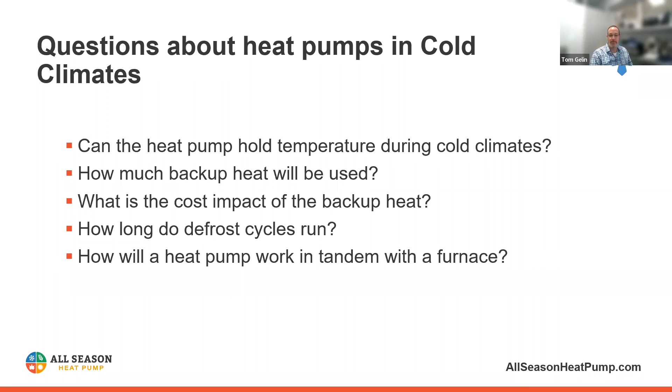So I imagine he was fairly conservative in his heat loss estimates. On the right side, the older home, that was heated by an oil furnace.

What we did was we pulled out the oil tank, we ripped out the furnace, and we have an all-electric solution on the green side, the west side. On the east side, because the load was more than the heat pump could handle, we decided to try out a dual fuel system on that side.

So when the heat pump can't supply the amount of heat required, the heat pump comes off and the furnace kicks on in heating mode. And in the cooling mode, it's of course all air conditioning. But we're just talking about heating today. That's where the bigger challenge is for cold climate heat pumps.

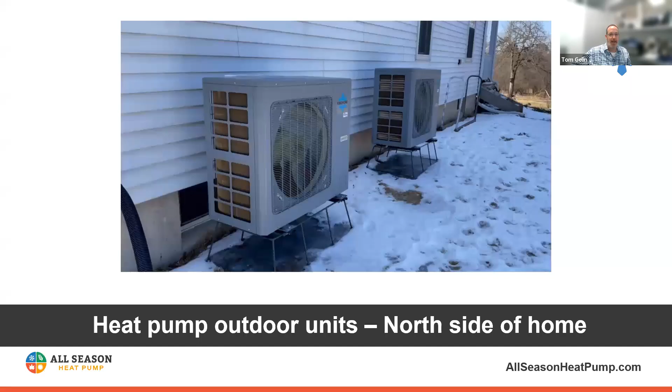Okay, so that's what we're looking at. Here's a picture of the installed heat pumps. This is obviously a beautiful winter kind of a day, but this is when the heat pumps are really going to be doing their work. So we got some pictures of that. They're mounted on the north side of the house.

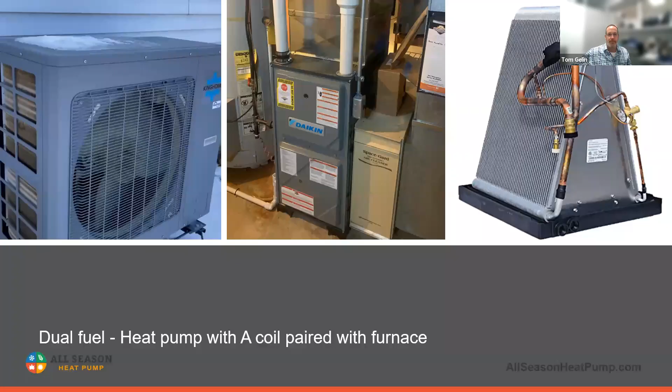Okay, so here's our east unit. So we've got our cold climate heat pump mounted outside. This is our dual fuel arrangement. So the owner bought a new Daikin furnace. And then above that is our heat pump coil.

I'm not sure. Can you see my mouse moving around? Eric? Yep, good. Okay. And then so yes.

Maybe not these dimensions, but the cold climate heat pump, or just basically the heat pump coil, is installed right above the furnace. And on the west side of the house, this is the smaller side, we have a vertical air handler. You can't see all of it, but at the discharge of the vertical air handler is our electric resistance element. This one's sized for 8 kW, so it's a fairly substantial electric heater, but keeping in mind that we don't anticipate it to run very often.

And so here's the guys from Professional Services today installing it. So that's what our setup is for our test.

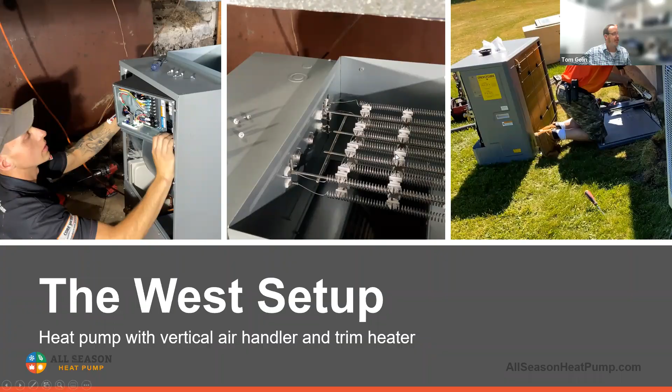Now, all we're using here is just a clip-on current transducer and then a data logger. So this is the power monitoring side of it. And for the temperature, we're going to monitor the inside temperature and the outside temperature and relative humidity. It would have been nice to have two of these. We just have one but there were two systems, so we kind of have an average temperature of what's going on in the house.

Okay, so here's our service tech, Zach, clipping on. You can see this, if you go down into this basement, it's something else down there. It's something out of Silence of the Lambs for those of you who are old enough to have seen that movie. Anyway, he's just clipping over the lines, and we're going to meter.

Now here's what we're metering. We're metering the east heat pump in totality, so not the individual fan or the compressor. It's the whole heat pump outdoor unit.

We're also monitoring the west indoor air handler. So the air handler is basically the fan that pushes the air through the system, and then the electric resistance element going on at the same time. And then the west heat pump. What we are not monitoring is the furnace. We didn't feel like it was necessary. And then also we're monitoring the outside and inside air temperature and the outside air humidity.

Okay, so why do we pick this particular week? Hopefully you all can see this. It's a little hard, going back and getting historical temperature information for the city of Saukville is not easy to find, but I did find it. So if we can just follow along why we picked this week, we started monitoring on Friday the 11th.

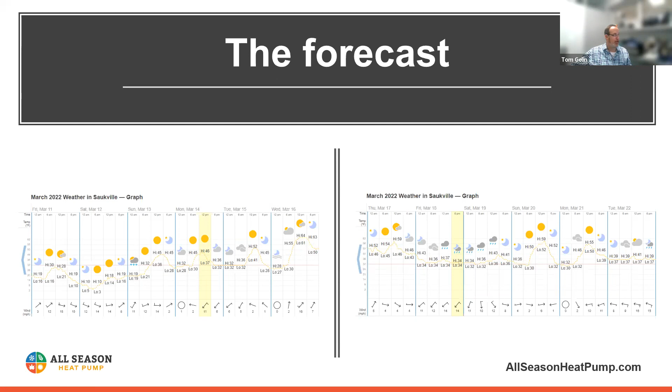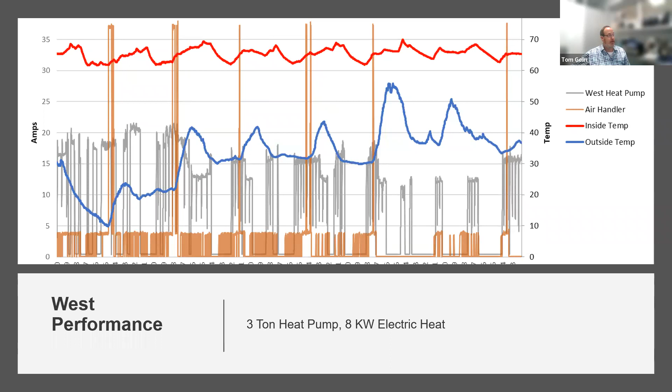So let's take a look a little bit. The first question we're asking ourselves is, how much is the electric heater on, and when is it on? Right out of the gate, when it got down to 3 degrees, the electric heater did engage for 74 minutes. And then over the course of the week, it engaged for another 20 minutes, 2 minutes.

And we can tell because the fan itself, when it's on, only requires 4 amps to run, and you can pull this off this middle data. When the heater is on at 8 kW, and you do a little bit of math at 240 volt single phase, the heater will max out at 37 amps. And then the heat pump runs at 18 amps. Okay, so we'll take a look at this in just a little bit more depth on what it means.

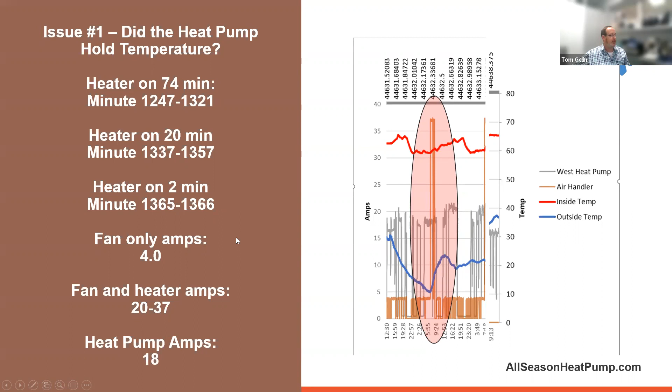Now, at the same time, that trim heater comes on, it produces 27,000 BTUs with double the amperage. So this is part of the reason why we want to make sure our cold climate heat pump is working through as much of the winter as we can, because we have to double our power.

Now, if you can imagine, if you had a heat pump that shuts off at 5 degrees or 0 degrees or whatever, then instead of running 18 amps throughout a lot of the winter, you're going to be running full load, which is going to double your electric consumption, while at the same time also running the heat pump simultaneously. So that's not good. We want to really minimize that electric heat backup.

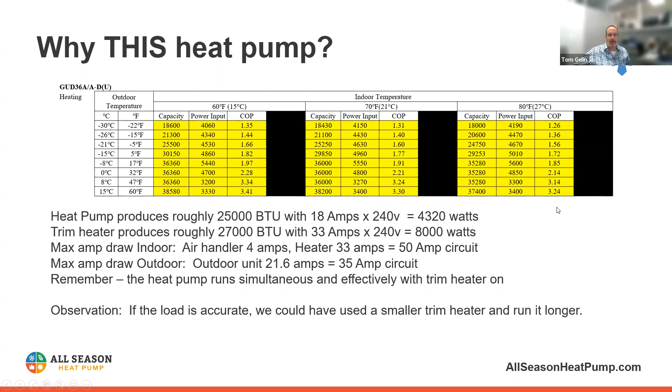All right, so that was fast and furious. Let's keep looking. Now, over the course of the week, it is my guess that this was on because of our cold climate situation. But with the temperatures here, it seems like this would have been a time that defrost cycles ran because we weren't under the capacity of the unit.

So it looks to me like our electric heater is kicking on in place as the unit's cycling through its defrost. That's the assumption that I made. And here's how long these alleged defrost cycles were running - 17 minutes, which is kind of like what you see online with how long a defrost cycle runs. And in a defrost cycle, what are we doing? We're running the heat pump backwards to push the heat out to melt the ice off the outdoor unit.

We'll probably have another webinar on that topic in its entirety. Okay, so these are the assumptions that we made.

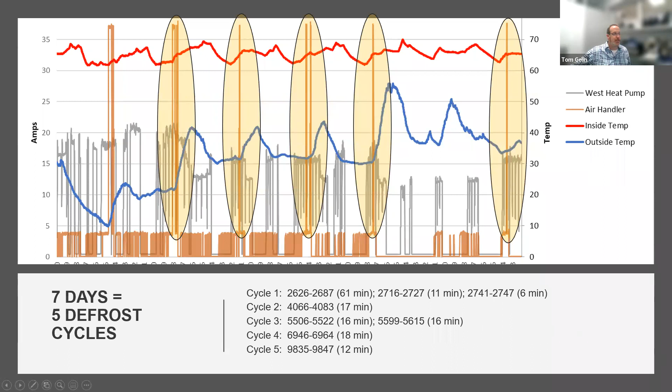This is what a heat pump looks like when it's in partial defrost. Usually in a full defrost, this thing would be completely iced over, but we can see that it starts at the top of the coil and works its way down. Because when the refrigerant is boiling inside and comes back as a liquid, that's where it'll see frost and then work its way down the coil.

So again, this is what the indoor air handler looks like, its components, and this electric heater is sitting on the top. Defrost cycle comes in all sorts of conditions, but over the course of the winter, as the temperature drops, the relative humidity always seems to be fairly high. So we could be running defrost cycles down to 10 degrees all the way up to 40 degrees.

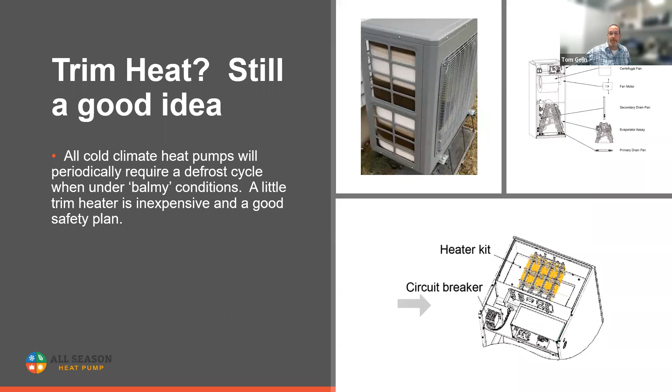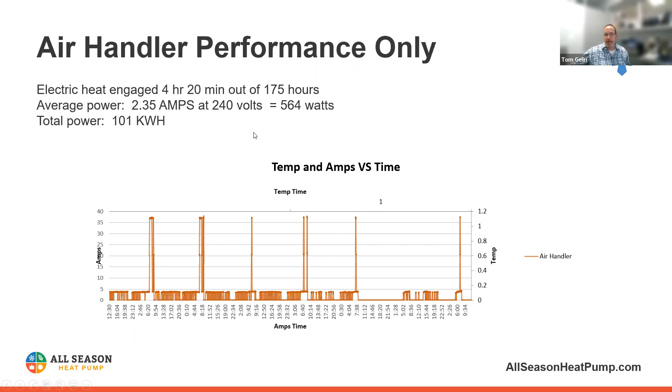If we sorted it, you can see that this electric heater really ran for just a very short period of time. We already had the totals, but just to put it in relative perspective. Then the fan was off for half the week, which would be typical for a Wisconsin winter over the season. Maybe not January, but over the whole season, we'd be cycling on and off, and we'd be on half the time.

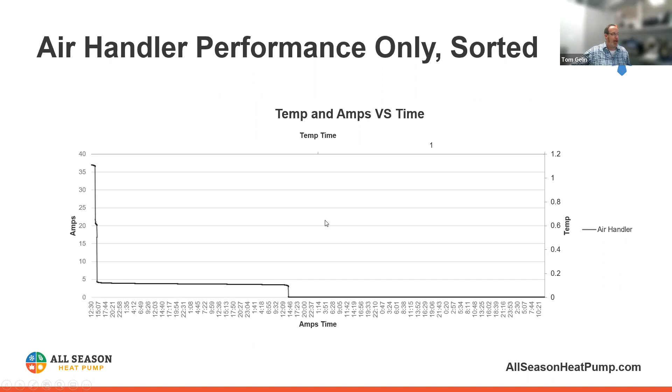As far as the West heat pump, this is again the all-electric heat pump. This is just the heat pump on and off and on and off. So yes, it is a variable speed heat pump, and we're getting different cycles, but a lot of the time when it's cold outside, it's either on or it's off.

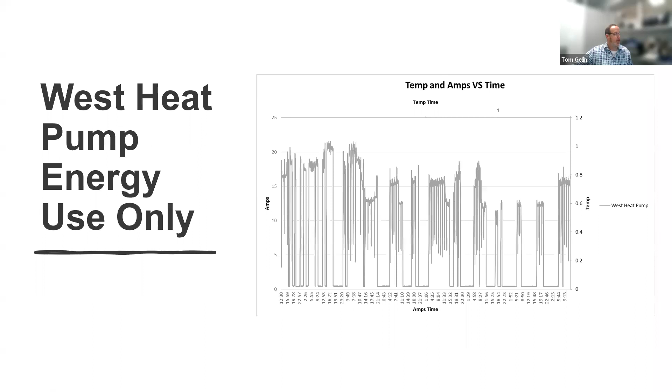If we sorted that over the course of the week, we can see that a lot of the time the heat pump's off, and some of the time it's in some partial load condition, and some of the time it's in basically full load.

Over the course of that week, what I did was take an average of all these data points, came up with an average of 8 amps times 240 volts, 1920 watts. Over the hours that it ran, it was 336 kilowatt hours for about a week. So end of the world for utility costs? Not really.

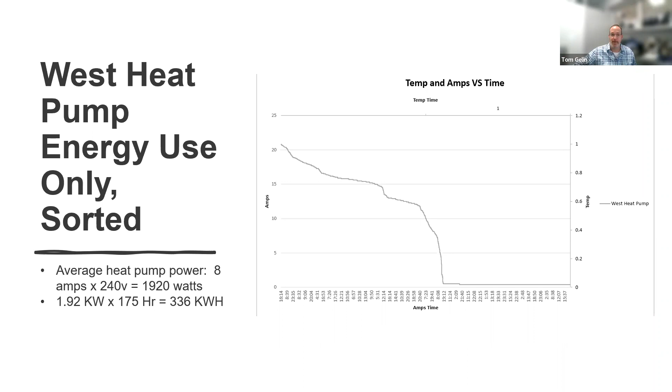This heat pump's been in operation - you saw some summer pictures - made it through its first winter. If I'm not mistaken, Saukville got all the way down to -12 for some time, so we did fine. I talked to the owner regularly, and they're very happy with the heat pumps they've got.

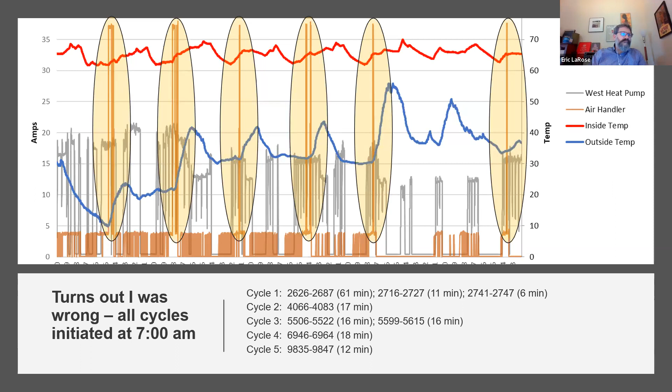Now this is the whole 'hey, let's not ship anything till it's perfect' situation. We started looking at the data, and it didn't make a ton of sense to any of us because we couldn't figure out why the defrost cycles seemed to have spacing that was almost equal. Turns out these aren't defrost cycles at all. Sorry to mislead you, but this is kind of how we came up with the information - we had it all figured out, and then we had to look back again.

What happened was the owners run night setback, which I don't know that we should have or shouldn't have told them, but they set their thermostats back to 60 some odd degrees. You can see on the temperature chart that it's dropping. Let's assume it's maybe 63 degrees, and then at 7 o'clock they turn the heat back up.

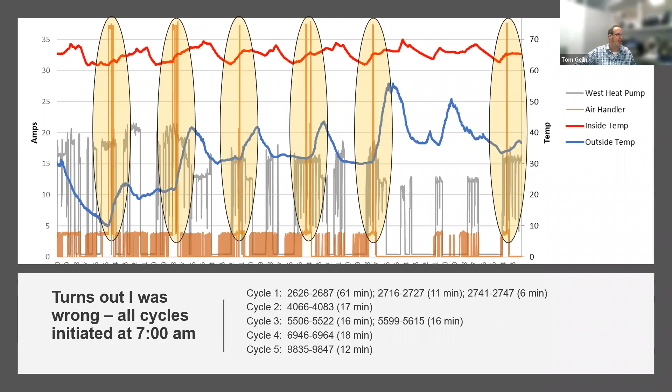So what happens is it's just a regular heat pump thermostat, not a Gree thermostat - it's a Honeywell heat pump thermostat, a really nice one. At any rate, the heat pump comes on, and it's not like a furnace where it's got all this extra capacity - it's got enough capacity to meet the load. After a couple of minutes, the thermostat says we're not meeting the space temperature, so we turn on the electric heat. What a shame. So here's when we go to the actual source data where we've got this all the time.

We've got the time, the power, and the outside temperature and all that. So at 7 o'clock every day, the thermostat says, let's run it back up to 70 degrees. After 1 or 2 minutes, the electric heat engages to keep us going. So no doubt that on Saturday it got down to 3 degrees in the morning, and it needed the electric heat to get to space temperature.

Had the heat pump been holding temperature, this 78 minutes would have been a lot shorter. On Sunday, it only took 17 minutes to bring the space back to temperature. Odds are that on Sunday and Monday, 16 minutes, maybe even Tuesday, and definitely Wednesday and Friday, we wouldn't have needed to run the electric heat at all.

I thought those were defrost cycles given the amount of time they were running, but turns out that was just the thermostat trying to keep up with the space. So boiling this down, we've got 78 and maybe 150, maybe 200 minutes. We probably could have gotten that down to maybe 20 minutes of electric heat use when it was down at 3 degrees. We'll have to do more experiments, but we wouldn't have known that had we not done the field test.

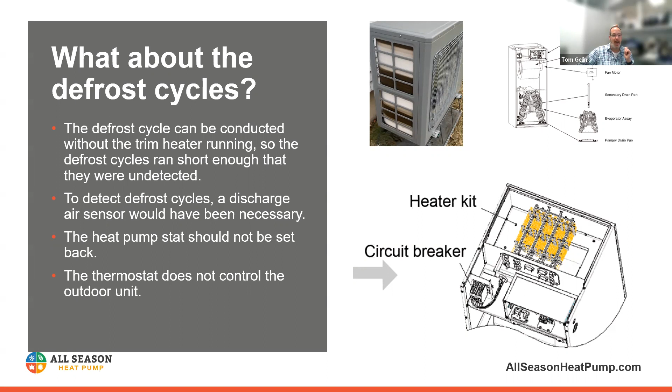So we think we have it, and I'm going to show you something next that makes me think we have it. I'll show you here—I'm going to share something else.

Let's see. Eric, are you seeing my spreadsheet or do I need to reshare? I do have to take it off of mute. I am seeing your spreadsheet.

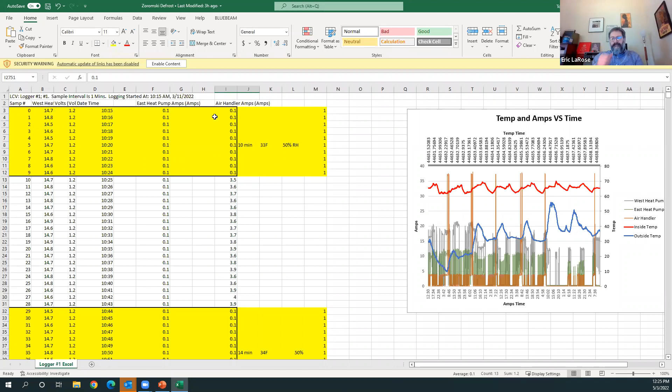Okay, great. So this is how the raw data came out. At 0 minutes, we're just hooking up our meters onto this equipment. Let's go a little bit slower. The west heat pump is the all-electric system. The east heat pump is the one that's tied to a furnace, and it looks like it's just off, or we haven't hooked it up yet.

So 0.1 amps tells us that the controls are running and that's it. On the air handler, same thing—the controls are running and that's it. We're going to be looking at column B and column I, and I've added this data. It was a little tricky because we set our temperature and humidity at 5-minute increments, and our power monitoring at one-minute increments, so I couldn't cut and paste—I had to do some handwork to get all this information in.

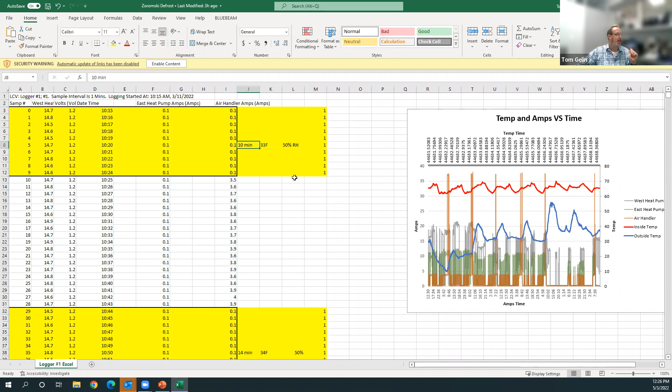So it would make sense that at 33 degrees and 50% relative humidity, we might be running a defrost cycle that ran for 10 minutes. Now at minute 10, which is 10:25 in the morning, our fan is running and our heat pump is running, and we're somewhere in this area on the time grid.

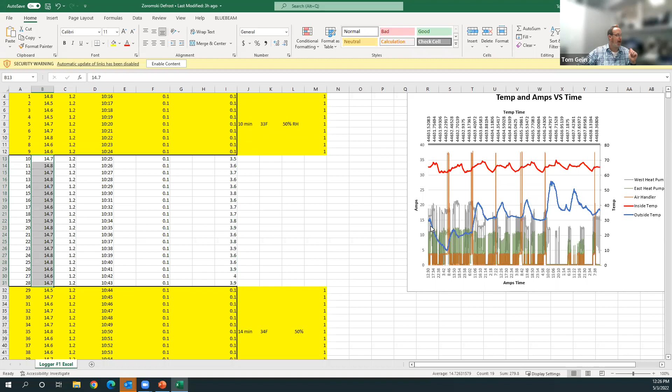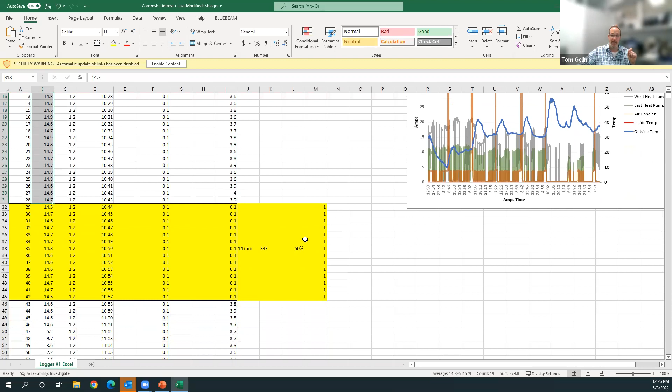So we're at a cooler temperature, so it makes sense to heat. And then we run another defrost cycle for 14 minutes. Now, we're going to revisit this data at a future webinar. This is just our best guess.

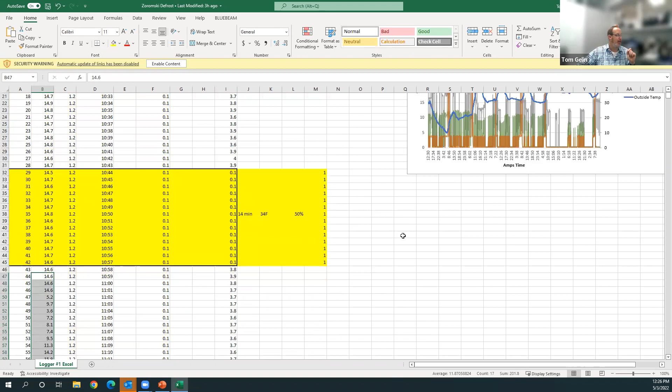And then it's off, the defrost cycle is off. We're back to running our fan, back to running our heat pump. Remember, it's getting colder outside. So we're cycling: defrost, heating, defrost, heating, defrost, heating, over and over.

And then we get to a point where we're just running continuously, because it's colder outside. I didn't plot all the temperatures here, but we know from our original grid it was getting colder and colder. That makes sense, because as it gets colder, the relative humidity outside drops, so there's less moisture to freeze on the coils. That's why we're running for a long time in heating mode.

Notice our heat pump's capacity changing. Sometimes it's nearly full at 18, sometimes it's down at 8. We're just matching our load.

Oh, a little defrost cycle—what time is this? This is at 4 in the afternoon. Again, a long period of time that the heat pump's running. At one point it turned off over here.

And then some more defrost cycles. Now we got some data later in this spreadsheet showing the heat pump's defrost cycles running a bit longer than I would have anticipated, so we want to play that out. But it seems like typically the defrost cycles are 5 to 15 minutes, which matches what you'd find just doing a defrost cycle search on the internet.

The mechanics of all of it, regardless of the heat pump, are the same. You're trying to boil refrigerant in a cold climate, so you're going to freeze the moisture that's outside on the coil.

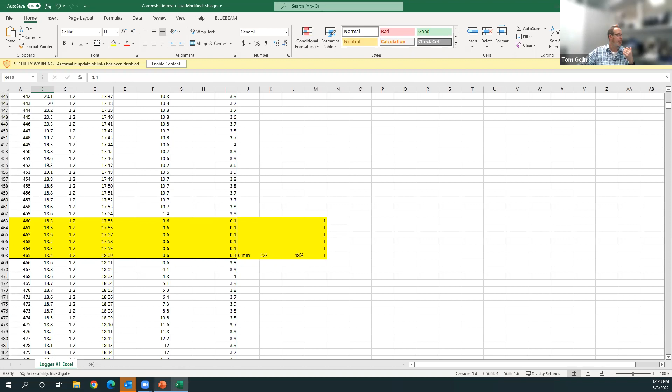Okay, so I'm going to go back to the presentation and share from the current slide. Roughly 10 minutes for defrost cycles at different times. We saw defrost cycles all the way up to 40 degrees and all the way down to 15. More on that in coming weeks.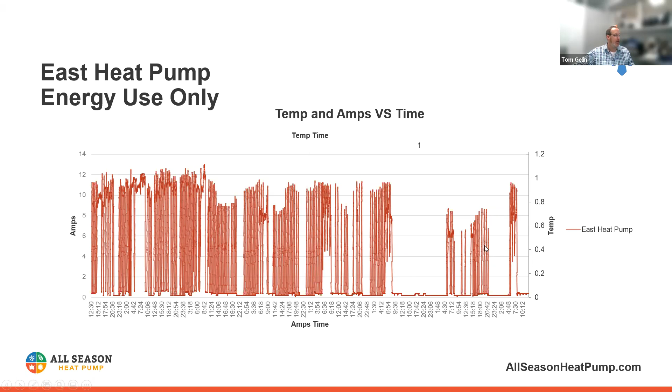So over the course of the week, at least half the time—and I know if we compared it to the west heat pump, that one was off a significant part of the week as well—my guess is that 3/4, 80%, maybe more of the time the heat pump met the load of the space.

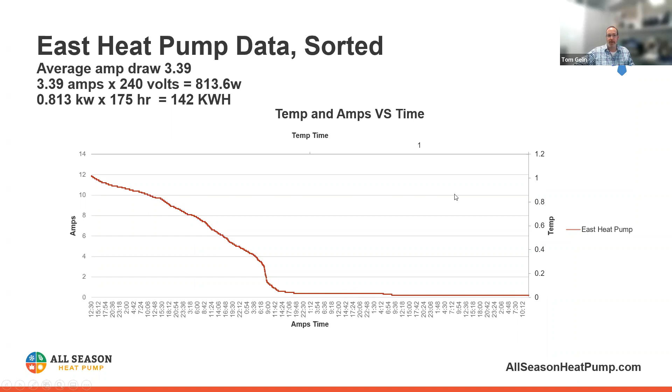Okay, so we're coming up to the end of our presentation here, at least with the facts and figures. So what do we learn? Number one, and probably the most important thing, is: in a cold climate situation, is this particular heat pump going to hold up?

Absolutely. Do I feel like it would have held up at -15? I do, because the mechanics of this heat pump, which we've covered in other webinars, doesn't really care how cold it is. It's just managing this four-way valve to deal with the colder climates.

Okay, so did it hold temperature? It did. And had we not had the morning warm up, it probably would have performed a little bit better.

Cost impact for backup heat: 101 kilowatt hours for just the trim heater, and 336 kilowatt hours for the heat pump. Again, we'd have cut that 101 kilowatt hours down significantly had we not done the night setback.

How long are the defrost cycles running? Typically 10 minutes. Some were longer, some were shorter. Again, more investigation on our part.

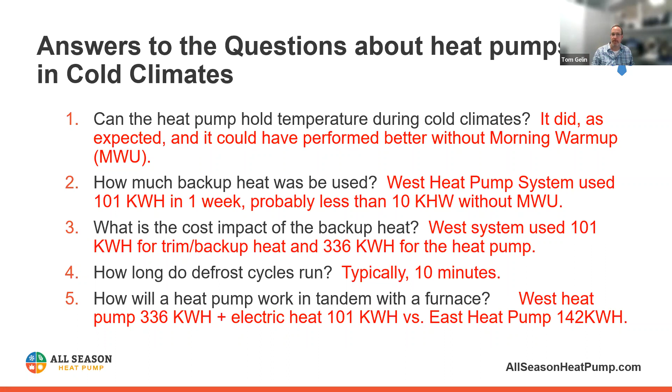A dual fuel is a good way to go. You don't have to go all electric to get the benefits of it. We saw on the East heat pump that we covered most of the theoretical winter by using the heat pump, which should pave the way for us doing more renewables. And that's my last slide.